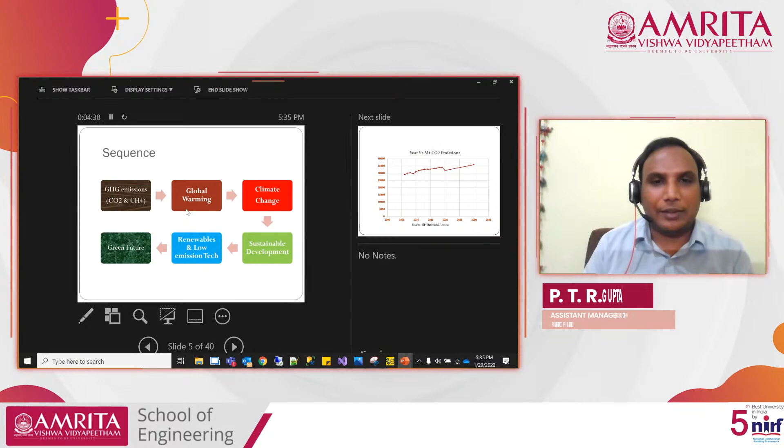And then the solution to this climate change is sustainable development. Sustainable development is nothing but consuming the resources so that coming generations will not suffer by overconsumption. And also, everyone knows we have finite resources, right? So in that context, sustainable development will be the solution to climate change. For sustainable development, we need to replace the current technologies. Like you have the vehicles, vehicular pollution, the mobility - everything is fuel based now. So to decrease the emission of these greenhouse gases from vehicles and other energy sector and manufacturing sector, we'll have to switch to renewable and low emission technologies, and this will result in a green future.

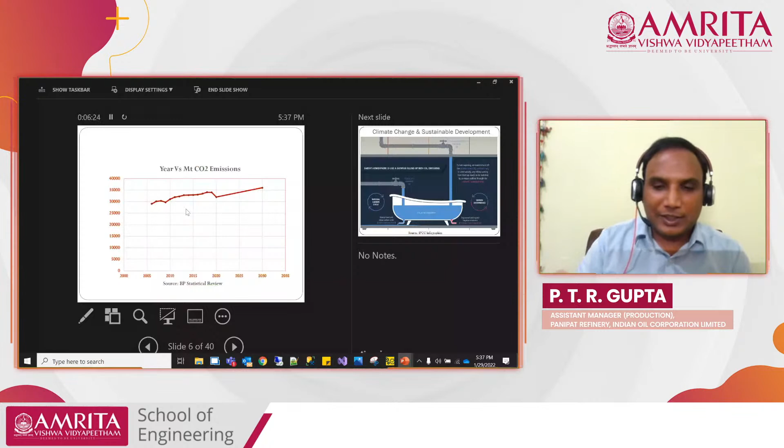In this context, I will explain what are the sources of CO2 and how best we can manage the CO2 emissions and also capture the CO2 emissions.

In this schematic, you can see two sources for CO2 emissions: one is the natural carbon cycle, and another is the human-made CO2 emissions, that is the emissions from the energy sector and manufacturing sector. And you have two outputs: one is the natural output, that is the carbon sinks, and another is the engineered reservoirs. We'll talk about it more in the coming slides.

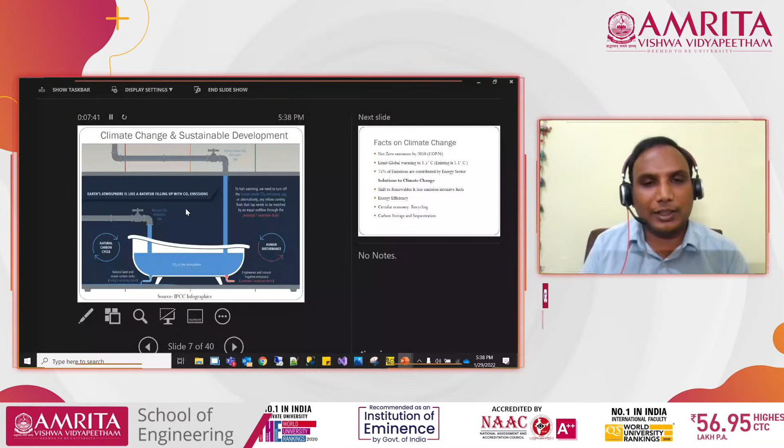Recently, Conference of Parties 26 was held in UK, and all global leaders have gathered and committed to net zero emissions by 2050, so that global warming is limited to 1.5 degrees Celsius. Currently it is 1.1 degrees Celsius already, so we have only 0.4 degrees Celsius margin to meet that commitment. And 75% of the emissions are contributed by the energy sector.

The solution to this climate change would be shift to renewables and less emission intensive fuels, and also improving energy efficiency, and adopting a concept called circular economy, like recycling - you can take an example of plastics. Many of the plastics can be recycled so that the resources can be utilized in an effective manner.

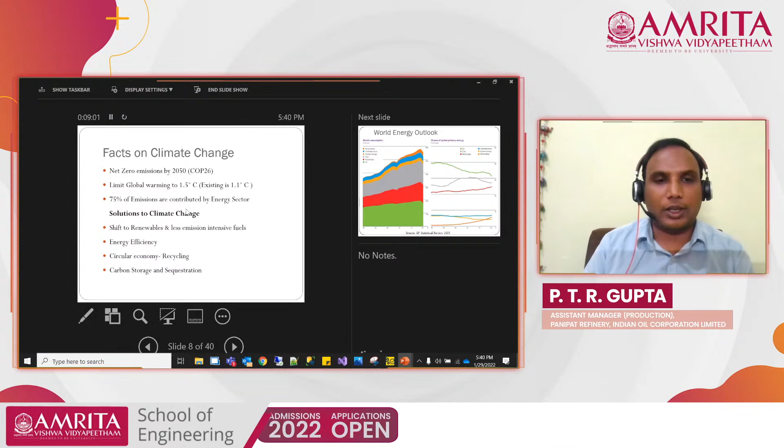If you look at the world energy outlook, you see that a majority of the share is occupied by oil and gas - around 600 exajoules is the total current consumption. And if you look at the trend on the right side, you would see that the share of natural gas and oil is declining, but other renewables are increasing.

But this decrease in oil and gas, I mean crude consumption, would not necessarily mean the total crude consumption is decreased, because there is a sector in oil and gas - the petrochemical sector - where a fraction of crude oil is converted into naphtha and used for producing petrochemicals, and petrochemical growth is growing exponentially. So the crude oil, although decreased for energy consumption, would increase because of petrochemical demand.

If you look at the changes in the total energy supply by 2050, this is how it's predicted by the International Energy Agency - an agency for predicting changes related to climate change. If you look at the first horizontal bar, that is the current situation - oil and coal are taking the major portion of energy supply.

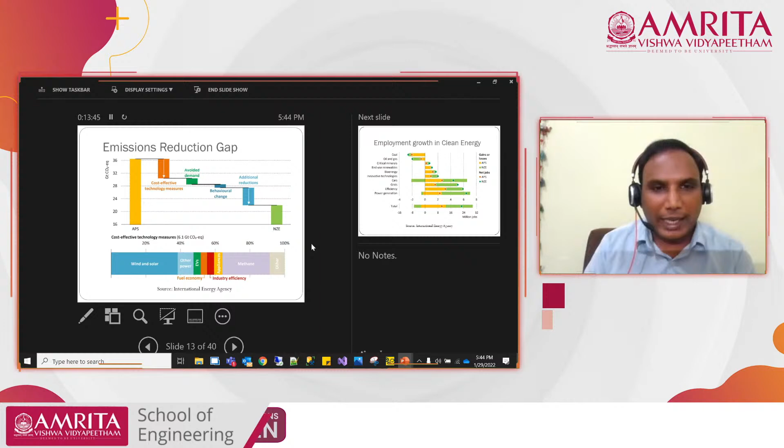Right now we are implementing a few measures shown in APS, the announced pledge scenario. Because of that, we have 36 CO2 equivalent emissions, and with net zero emissions it comes around 22. So the gap is filled by cost effective technology measures, and within those, wind and solar are taking the major share.

This is employment growth in clean energy. If you look at coal and oil and gas, there would be a decrease in jobs, but the decrease in oil and gas will be compensated by the petrochemical sector. In the automobile industry, there will be a net decrease in jobs. But in bioenergy and renewables, and critical minerals consumed in batteries and renewable production, you will see a net increase in jobs.

Coming to biofuels, you have a variety of feedstocks like agricultural residue, such as the stubble that is being burnt. One classic example is in and around Delhi NCR, where there is a lot of stubble burning. So now companies, including my company Indian Oil, have adopted 2G, 3G ethanol processes where the stubble is collected and converted into ethanol.

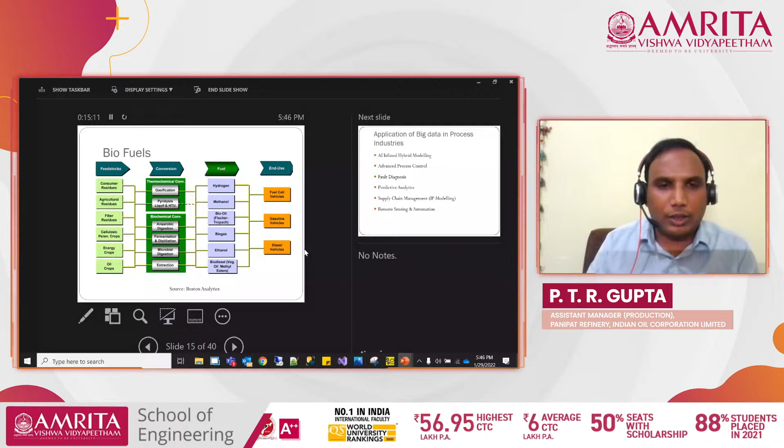Ethanol is blended as a gasoline and diesel fuel. There are various conversion technologies, and finally you get hydrogen, methanol, bio-oil, biogas, and also ethanol and biodiesel. The end use is mapped to fuel cell vehicles, gasoline vehicles, and diesel vehicles.

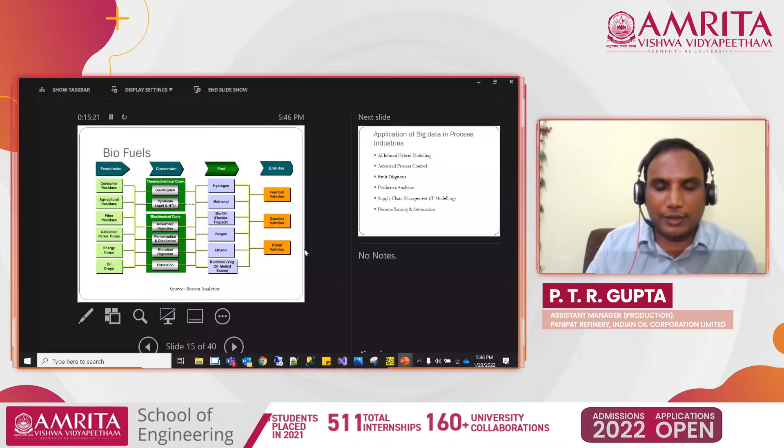Coming to the application of big data in process industries - hybrid modeling. In chemical industries, all the processes that take place are modeled using first principles, the concepts applicable to chemical engineering are used and models are generated. In typical process industries, a lot of data is being generated.

In artificial intelligence, we have models called neural network models, wherein they try to analyze the data, filter it, and find patterns within it. Let's say if you have two refinery setups, for one refinery setup only a specific model will be applicable, so you cannot replicate it in a different refinery because the configuration is different.

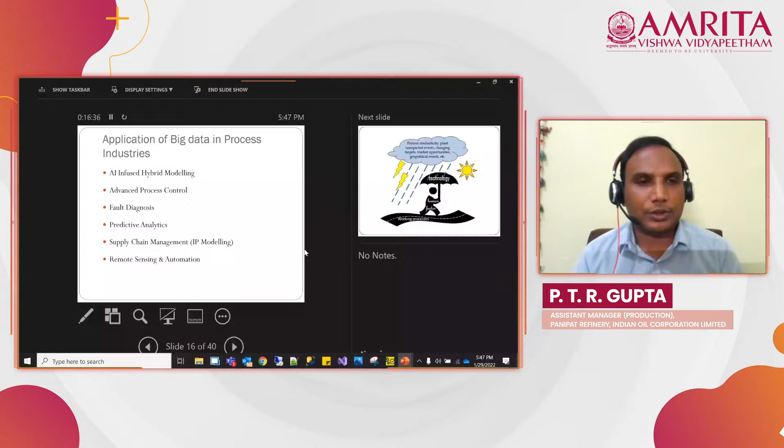So the first principle based model and this data based model, in which patterns are found and functions are made, these two are coupled together, and finally there is this AI infused hybrid modeling.

Coming to advanced process control, in typical industry, process control uses a normal functional block which takes the disturbance variable and gives the output so corrective action is taken. But in advanced process control, based on historical data of operating conditions and lab quality parameters, it will predict a model and take action based on that. So it's an advanced control where the response time will be much less.

Then fault diagnosis: if you have any upset events, or suddenly your plant trips or your process is disturbed, it will automatically analyze the data and tell you the solution, prescribing what the solution is and also the root cause.

Predictive analytics is nothing but prediction of parameters of the end products based on the operating conditions. It is somewhat similar to advanced process control.

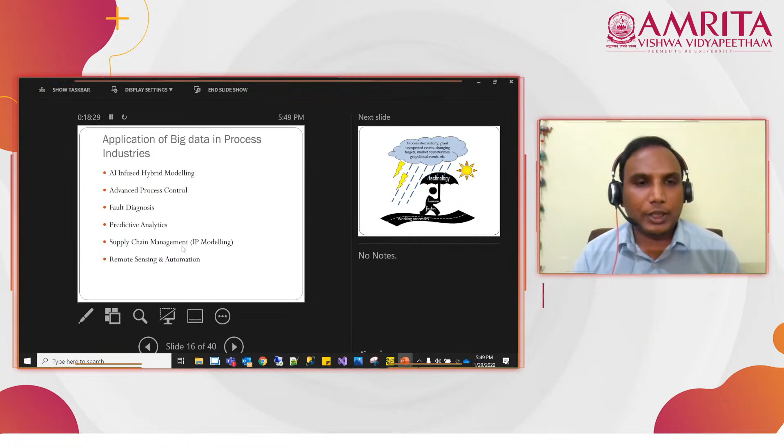Supply chain management is called integrated planning modeling. In a typical refinery operation, you have a lot of variables to take care of, and lots of crude blends - from Basra, West Texas Intermediate, and other Arab countries. 70% of the cost of producing fuel products goes to the cost of crude oil; only 30% is processing cost. So you should be very wise in deciding which crude blend to select so that profitability is maximized. In that context, supply chain management and IP modeling tools are very important.

Remote sensing and automation: in the context of Indian Oil, we have 56,000 touch points like customer retail outlets and other customer interfaces. To manage distribution of fuel to all those places, you need a lot of real-time sensing and real-time automation. Companies are adapting this technology at a very rapid pace.

This is a schematic showing how big data technologies are helping work processes by protecting from process stochasticity, plant unexpected events, changing targets, market opportunities, and geopolitical events.

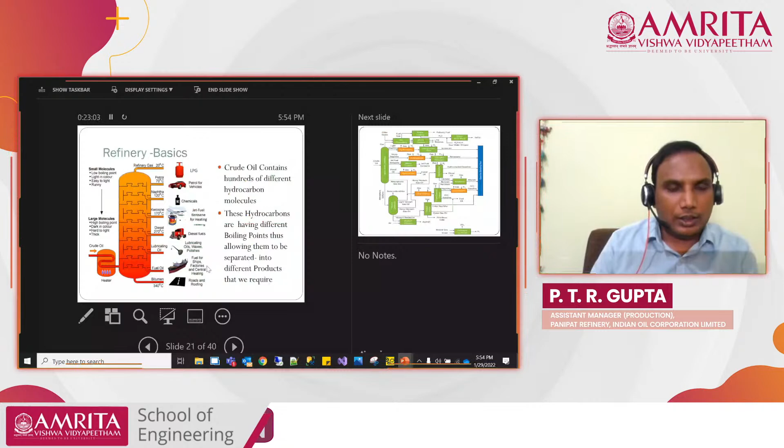So this is a typical figure which shows different cuts of crude oil and related end use products. You have LPG, second is petrol, that is gasoline, and then you have the naphtha cut which I was just talking about. And then you have aviation fuel, diesel, lubricating oil, fuel oil, bitumen.

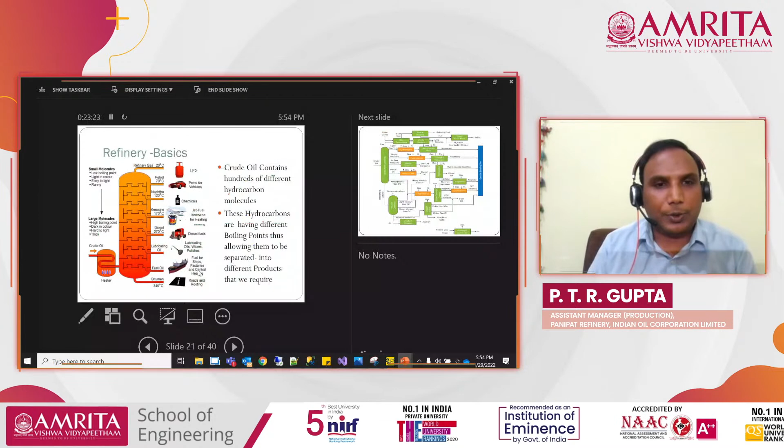So it's not directly produced. There are a lot of primary, secondary, and tertiary processes, and a lot of streams coming from different processes are blended, and finally petrol, naphtha, and kerosene is made, along with other products.

So this is a typical configuration of a refinery. You have the primary units, that is atmospheric distillation and vacuum distillation, and secondary units to increase the yield. Basically, in crude you have a variety of cuts, carbon molecules varying from C3 up to C35, C50.

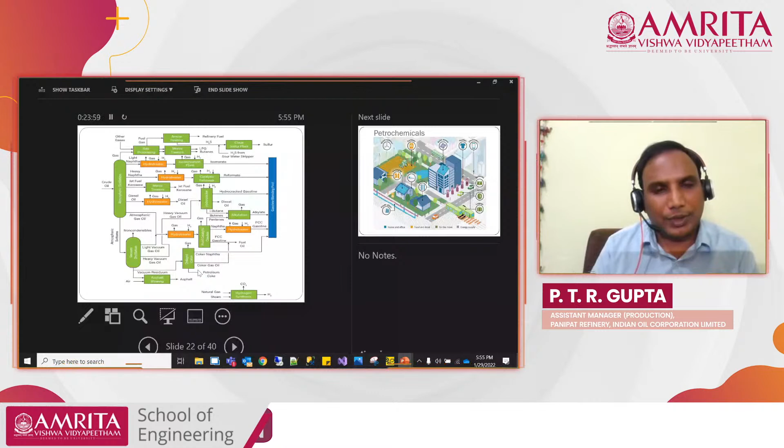So for the heavier cut, to increase the yield of the distillates, that is the lighter cut, we use secondary processes, and then tertiary processes to produce coke and other value added products.

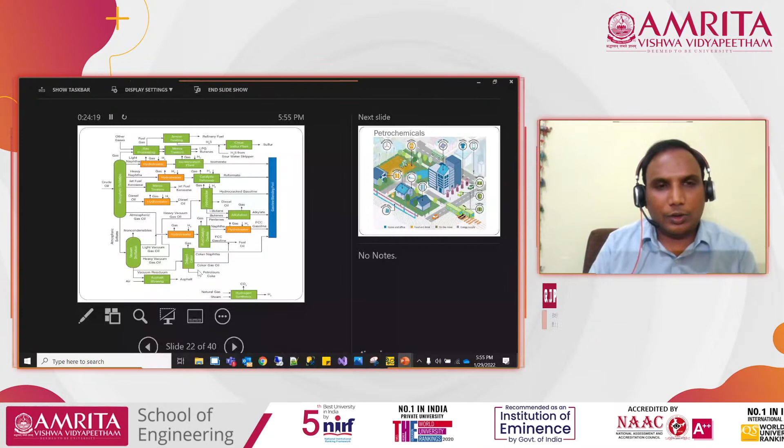So basically, in a typical refinery, the configuration itself is fixed, but the routing of the streams can be changed so that the overall profitability of the refinery can be increased.

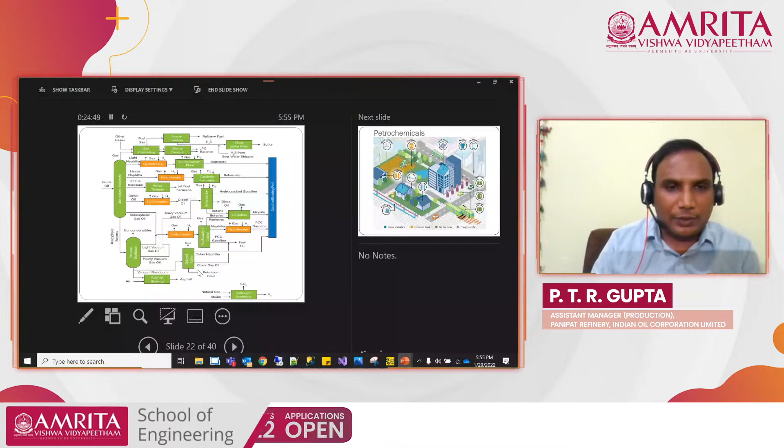Let us say now the demand for gasoline is high, so obviously the price would be high. So we can change the streaming of the different cuts, and then my gasoline production can be maximized. So it's simple if you look at the flow diagram, but very complex when you actually work out economics and other technical feasibilities.

And coming to petrochemicals, if you look at this image, you can see a lot of day-to-day applications in terms of home and office. You can see plastic pipes, you have PVC pipes at home. You have HDPE, LDPE, polypropylene, polyethylene, and toiletries, where you use polyethylene, high density polyethylene, and also in packaging.

And in food and drinks, you have preservatives that are derived from petrochemicals. And if you look at transportation, you have tires, which is a polymer - it's a product of the petrochemical industry. And you have luggage, in which polypropylene and high density polymers are used, and also in batteries.

Even in fertilizers, you have ammonia and other hydrogen being used - naphtha is also used there, so that is also a product of the petrochemical industry. And you have textiles and electronics. So what not - you have a wide variety of products that are produced from the petrochemical industry.

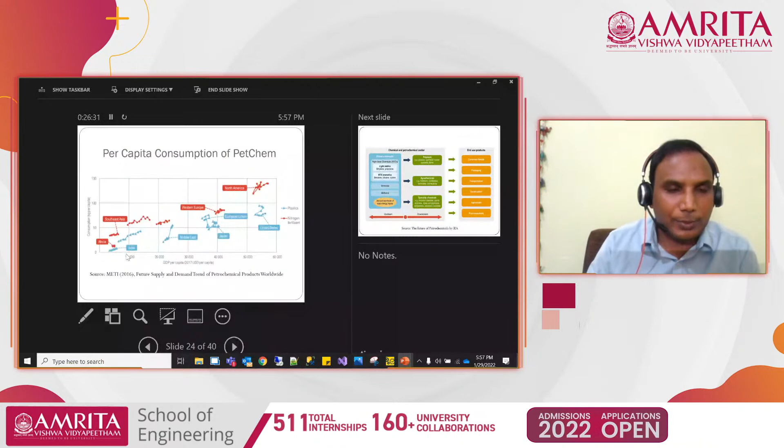So just to have a sense of how the petrochemical industry is going to grow - this is GDP per capita on the x-axis, and on the y-axis you have per capita consumption of petrochemical products. If you look at India, it's very low, almost around 10 kgs per person. But if you look at developed countries, it's almost around 125, 130, and in some countries it is even touching 140.

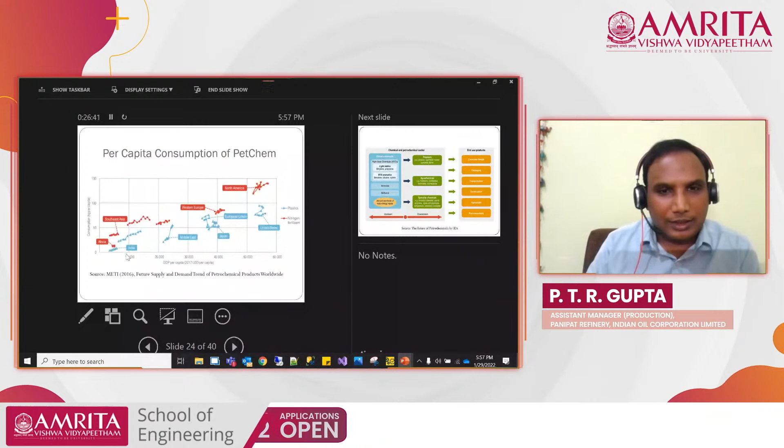So you can see that it's increasing - the growth is huge. There is a lot of potential in the petrochemical sector.

So this is the typical value chain of the petrochemical industry. You have primary chemicals like light olefins - ethylene and propylene, and benzene, toluene, xylene, ammonia, and methanol - and these are in turn converted into polymers, agrochemicals, and specialty chemicals. And finally, the end use products, that is consumer goods, packaging, transportation, construction, agriculture, and pharmaceuticals.

So I was talking about refinery and petrochemical integration. There are many different layers of integration. If you have only refinery, that is at the base layer, and then you can include benzene, toluene, xylene extraction, and propylene unit, and then you have refining and a steam cracker and paraxylene complex.

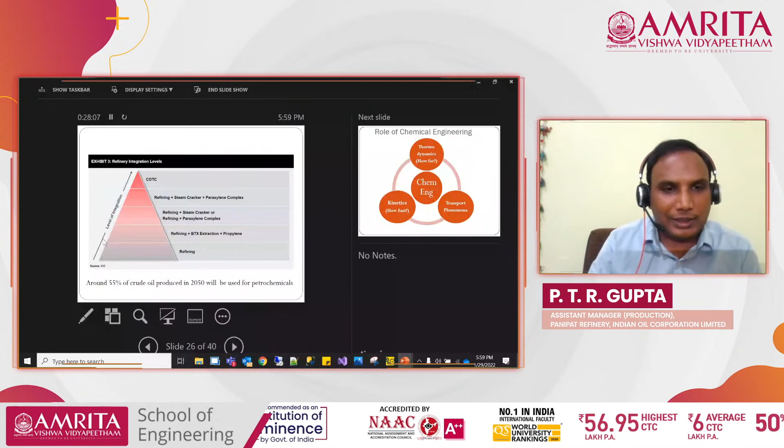So I have mentioned that around 55% of the crude oil produced in 2050 will be used for petrochemicals production. Only 45% will go for fuels like aviation fuel, other road transport fuels, etc. So basically, the demand for the fuel sector is decreasing, and the technologies required for conversion of crude oil to chemicals, that is petrochemicals, will gain a lot of importance.

So now coming to the role of chemical engineering. We have talked about what is the energy industry, and what all are the challenges and opportunities.

If you look at typical chemical engineering coursework, we have three fundamental subjects. First is thermodynamics - if you look at any process industry, some reactions are taking place, and thermodynamics defines what is the maximum achievable yield for a given reaction. We also study kinetics, that is how fast the reaction will take place, so with what residence time you can achieve the conversion.

And then transport phenomena - within transport phenomena you have heat transfer, mass transfer, and momentum transport. So all these three fundamental concepts put together, we apply in process industries, with the help of other fields like data science, biology, material science, economics, etc. Finally they are useful in designing and operating the technologies.

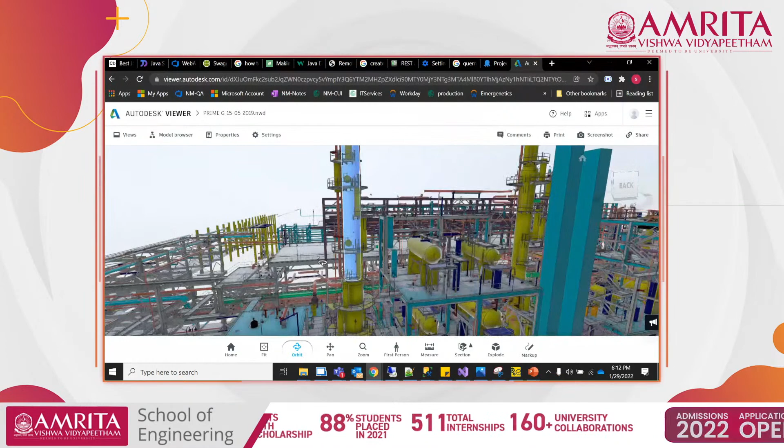This is a typical distillation column. The column here you can see, and we have other equipment like heat transfer equipment, like air fin coolers, and also we have a lot of reactors and control valves, a lot of flow control equipment.

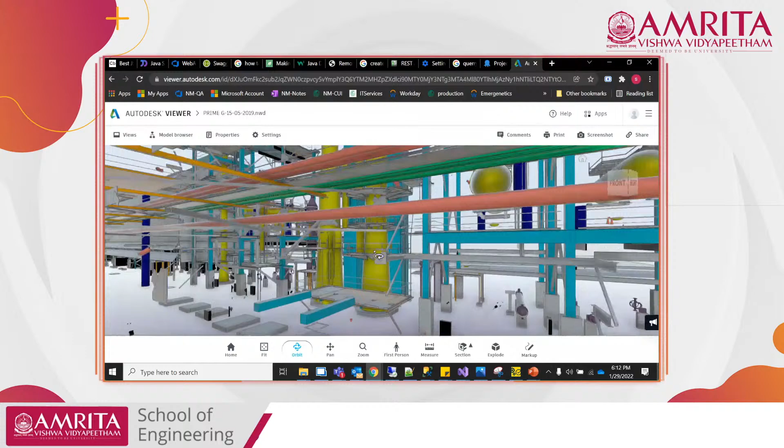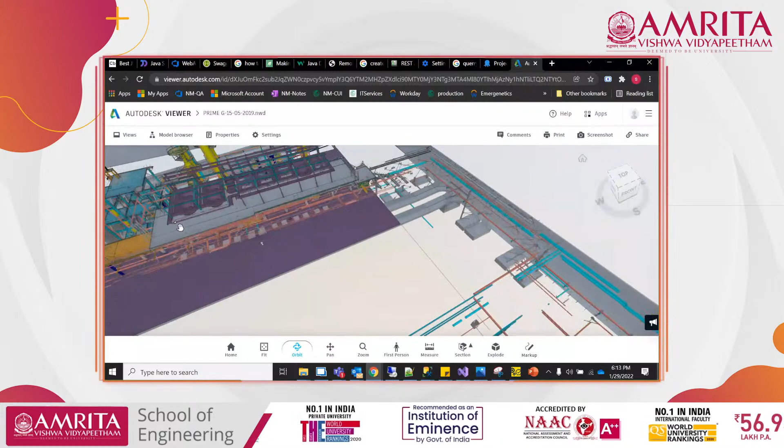This is a typical heat exchanger, and we have fired heaters that are used for increasing the process temperatures, and we have a reactor. So this is the reactor.

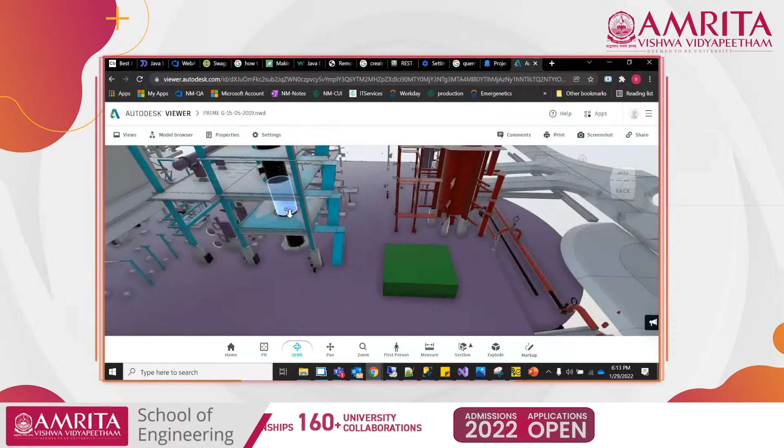So that's it. I'll finally conclude - there is a lot of exciting future for chemical engineers. If you have any questions, you can write to me, I'm sharing my contact details.